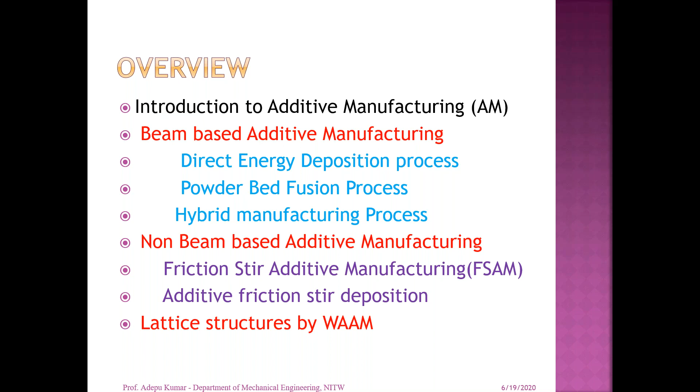Basically any manufacturing process can be categorized into 3 areas: subtractive, additive, and formative process. In subtractive process, you remove material from the stock to develop the product. In additive process, you add material layer by layer to finally achieve the final product. In formative process, you just change the shape from initial to final form.

Additive manufacturing is a manufacturing process in which functional parts can be made by adding materials without using special tools and fixtures. Without using these tools, jigs and fixtures, you have a lot of advantage in terms of reduction in lead time, less wastage, and cost independent of complexity of materials.

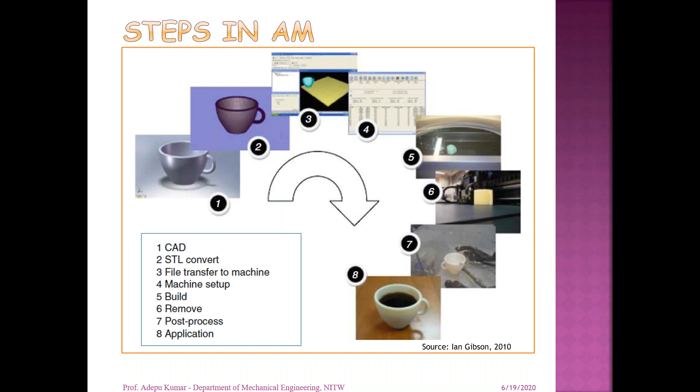Coming to the difference between CNC machine and additive manufacturing with respect to material, speed, complexity, accuracy, geometry and programming: if you see this picture, this cup is made of ceramic material, which is not possible in CNC machining process with good accuracy and good geometry.

Whereas in additive manufacturing, we can produce the component very easily, even ceramic materials. With respect to complexity, if you want to generate different cooling channels in electronic devices, because of their complex nature, CNC is not suitable, and you cannot get the accurate shape and size of the channel.

Once you apply this same technique to additive manufacturing process with respect to any complexity, because you are divided into STL file, and that STL file is the combination of each and every geometry, then you can able to produce the component very easily.

Coming to accuracy and geometry point of view, accuracy is very fine in CNC machine compared to AM machine, because some problems encountered during the solidification process of the additive manufacturing process that leads to inaccuracy, not equal to the accuracy we get from CNC machines.

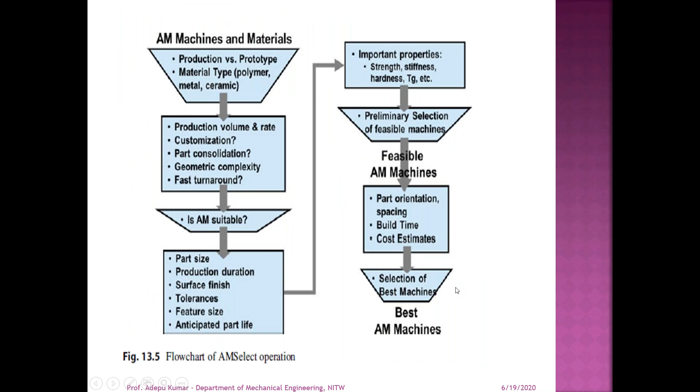After the break-even point, because you are producing more components with the use of a single machine, the cost is divided among the number of components, so the cost is reduced after the break-even point. Based on your production volume, you can decide which process is suitable for producing the components.

thermal energy to fuse material by melting it as it is being deposited. When you apply laser as an energy source, you can feed the powder with the proper flow rate at the exact focal point of the laser beam, where the maximum energy is available. That energy is utilized to melt the powder particles and deposit them onto the substrate.

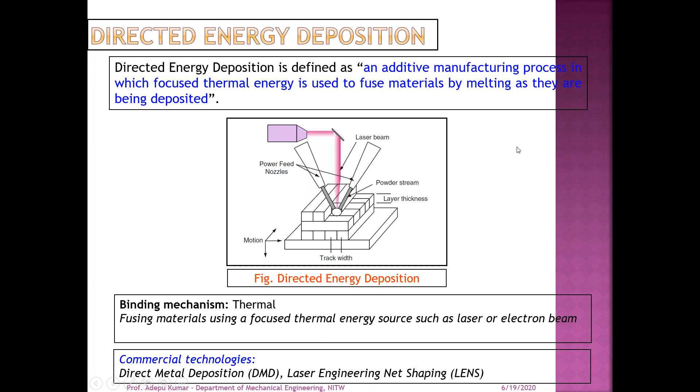It is also an additive manufacturing process generally used for repair and rebuild of worn or damaged components, to manufacture new components, and to apply wear and corrosion resistance coatings.

DMD produces fully dense and functional parts directly from CAD data by depositing metal powders pixel by pixel using laser melting and a patented closed loop control system to maintain dimensional accuracy and material integrity. With feedstock, 6-axis deposition, and multiple material delivery capability, it can coat, build, or rebuild parts having more complex geometries.

This is one of the energy sources, the electron beam, which we can use for building components through the additive manufacturing process. It is similar to electron beam welding.

You have an electron gun, and it emits electrons when high voltage is applied to the electron gun. It reaches thermionic temperature, and at that temperature electrons are emitted. Those electrons travel from the electrode to the target plate through the focusing coil and deflection coils.

You need to maintain a vacuum environment in electron beam welding, using electron beam as an energy source for the additive manufacturing process, because the electron mass is very, very low compared to the mass of nitrogen and oxygen present in the atmosphere. If you operate in open atmosphere, the target area is not reached because the electron's mass is very low.

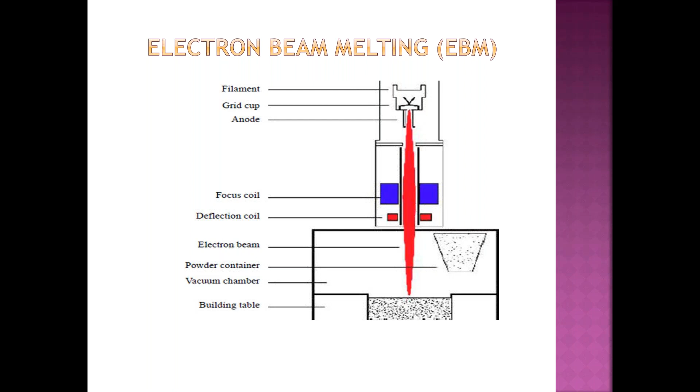This movement of the electron beam is similar to the geometry obtained through a CNC X and Y axis plotter from the CAD data file, with which you can generate different configurations of the components.

Depending upon the material you are going to use for additive manufacturing components, you can use either laser or electron beam as the source. This is the direct energy deposition process, where energy is directly impinging onto the powder particles or feeding material, causing melting and deposition to take place.

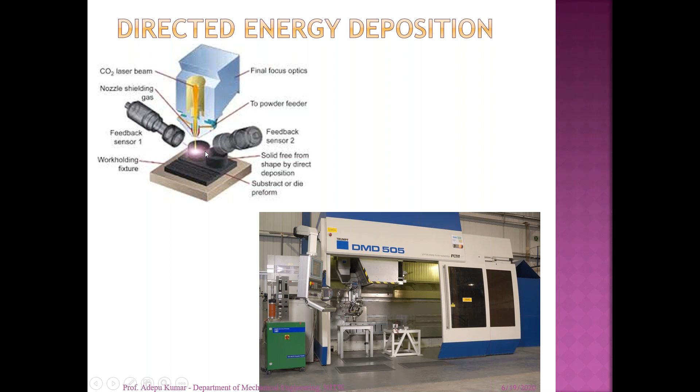This video shows a laser as a power source, where you feed the powder particles from the nozzle, and interaction between the laser and the powder particles causes melting to take place. This is another example.

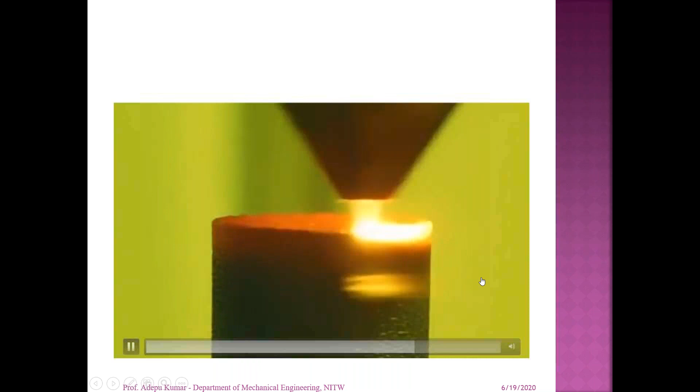Here the feed material is in the form of wire. You apply the laser or electron beam, and the material is melted and deposited onto the substrate.

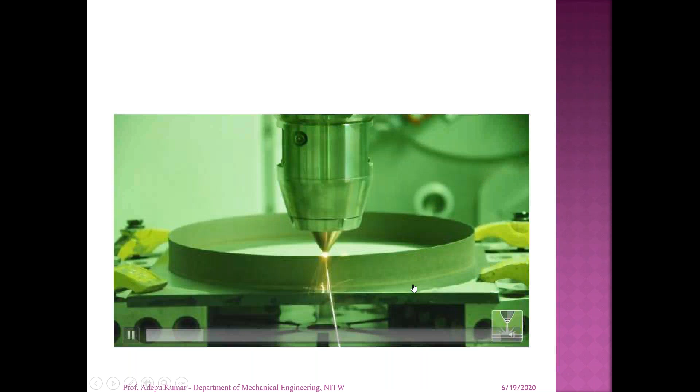So this is DED technology, with electron beam as a source or laser beam as a source. You feed the powder particles through different processes, melt the material, and deposit it onto the substrate. You can generate very complex geometries, and there is a difference between electron beam and laser as sources.

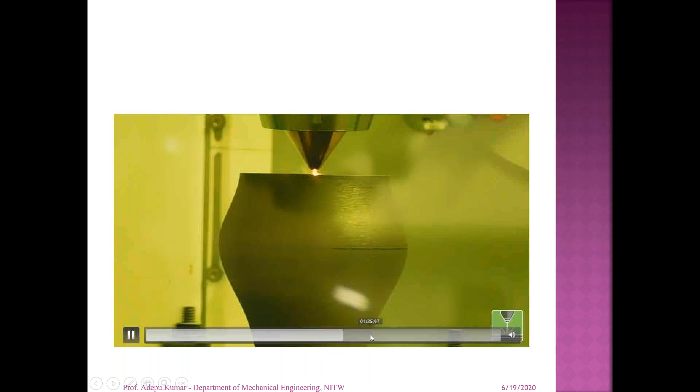The first one is a thermal source - electron beam. The second uses laser as an energy source. Regarding atmospheric conditions, electron beam always requires vacuum because the electron mass is very low compared to nitrogen and oxygen molecules. That's why you need to create a vacuum.

Some materials are active in open atmosphere, like titanium, aluminum, and magnesium alloys. For these you can go for an inert gas environment, so the material will not react with oxygen or nitrogen present in the atmosphere and form oxides. That's why we need to avoid oxide formation, so you go for an inert gas environment.

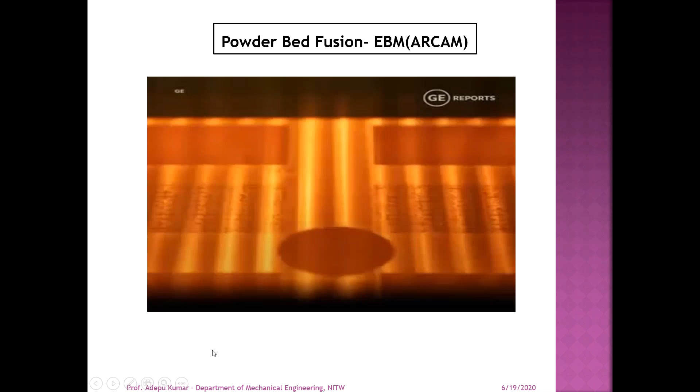The benefits: you can have high productivity because electron beam has high power density compared to laser, suitable for mass production. No residual or internal stresses develop because you concentrate energy on a particular area without affecting other areas as much as in powder bed fusion process. Less support is required for parts, and it's possible to stack parts on top of each other. There's no gas contamination and you get very fine structure and good mechanical properties because you use vacuum as the environment in electron beam melting.

There won't be any gases initially, but gas contamination can occur over a period of time because the melting of the material forms oxides, leading to gas contamination over time, not initially.

The drawbacks: conductive materials can be possible in electron beam source, then powder is sintered so it's tricky to remove. Long dead time between two productions, because every time you need to create a vacuum in electron beam as a source. That's why long dead time is needed for the electron beam melting process. And expensive maintenance cost, because you need to create a vacuum.

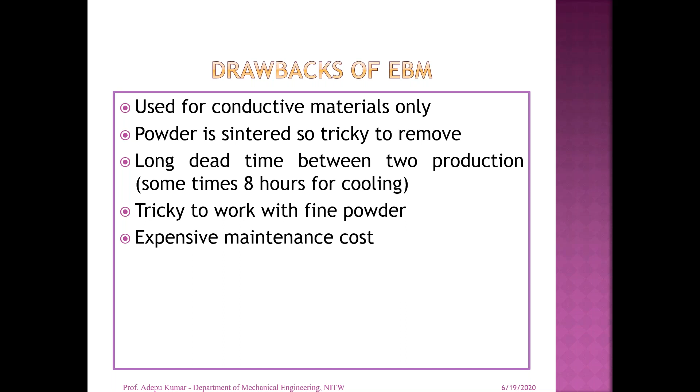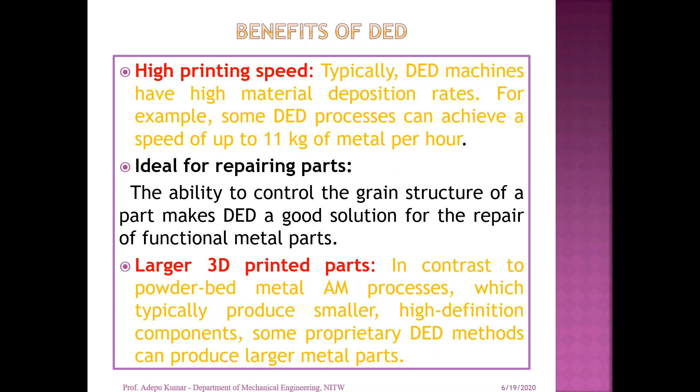The benefits: you can have high printing speed, because a lot of energy is available, you can go up to 11 kg per hour, and it is ideal for repairing parts, especially with the DED process. You can go for repairing of high structures like turbine blades. Then larger 3D printed parts and multi-material capability. You can also develop multi-material capabilities with the DED process, and high quality metal parts and hybrid manufacturing capabilities are also present in DED technology.

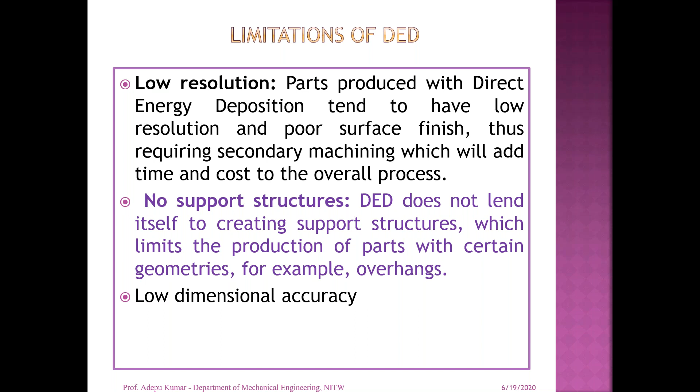Then limitations: low resolution and no support structures. DED does not lend itself to creating support structures as in the case of powder bed fusion process, but that is a limitation in the DED process. Then low dimensional accuracy. Applications include die repair and refurbishment, thermal management, direct metal products, and surface modification and coatings, aerospace and aircraft component repair, and these are turbine blades repaired by LENS or DMD technology.

Coming to the powder bed fusion process: powder bed fusion is defined as an additive manufacturing process in which thermal energy selectively fuses a region of the powder bed. Here the source is a laser source. Then you can move the XY plotter according to the STL geometry, STL file geometry. Then the laser moves in a particular direction so that it interacts with the powder particles. Then the powder particles are fused and solidified onto the surface so that you are able to build the components.

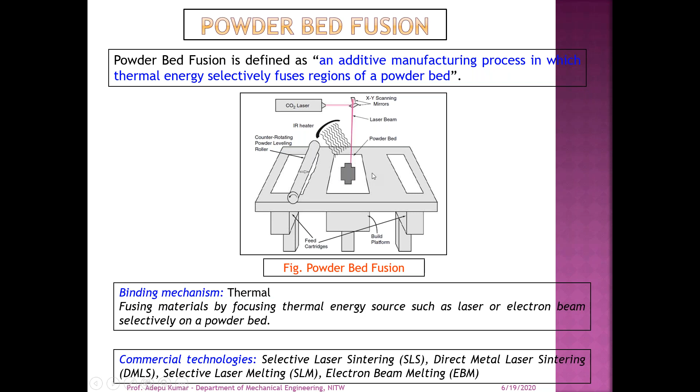Then the basic mechanism in laser-metal interaction: when this is a substrate material, the laser interacts with the substrate. Some of the laser is reflected back, some is scattered, and some is absorbed by the material. Then some of the laser is transmitted through the material.

So we need a unique property of material used as a laser power source, it should not have highly reflective materials, because if it is highly reflective, whatever energy comes from the laser source that interacts with the substrate or powder particles gets reflected totally. 90% of the energy is reflected back, only 10% is available, and that 10% is not sufficient to melt the material. So you need to avoid highly reflective materials. Because of this limitation, people also coat non-reflective materials onto the reflective materials, so that a small cavity is formed, which is enough for melting the material.

So you can relate this to radiant transfer in a black body. Once light is emitted and impinges on the small cavity, it reflects back and forth so that heat is accumulated. Then we can treat it as a black body.

Similarly, the small thickness of the layer, which is highly non-reflective in nature, takes care of the highly reflective material. Then it creates a small cavity, which is enough for the light energy. The laser impinges onto the cavity, then it reflects back and forth so that the energy is accumulated, and that energy is transferred to the substrate so that the metal is melted.

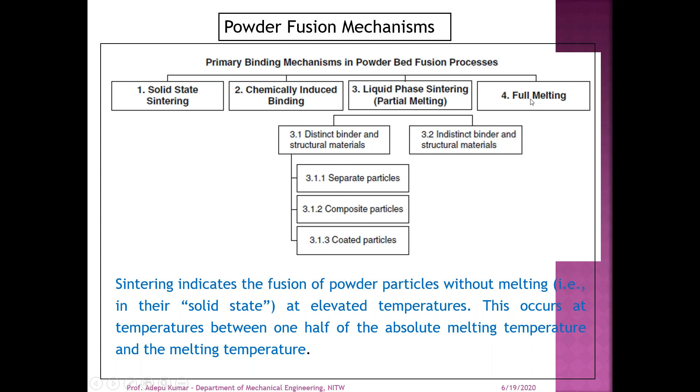So what is solid sintering? You can see the spherical powder particles combined together with voids between them. Once you apply energy, that energy is absorbed by the spherical particles and necking formation starts. This necking continues during sintering, so the porosity and cavity become very low compared to the initial state. This is one mechanism used in powder bed fusion process.

Another mechanism is chemically induced sintering. For example, laser processing silicon carbide in the presence of oxygen, where SiO2 forms and binds together a composite of SiC and SiO2. If you process SiC in an open atmosphere, the oxygen reacts with the SiC to form SiO2, which acts as a binder between the SiC particles to form a composite.

Similarly, zirconium boride in the presence of oxygen forms zirconium oxide, which binds together a composite of zirconium boride and zirconium oxide. Another example is aluminum in the presence of nitrogen forming aluminum nitride particles. Using this technology, we can combine SiC and SiO2, or aluminum and aluminum nitride, to make composites very easily.

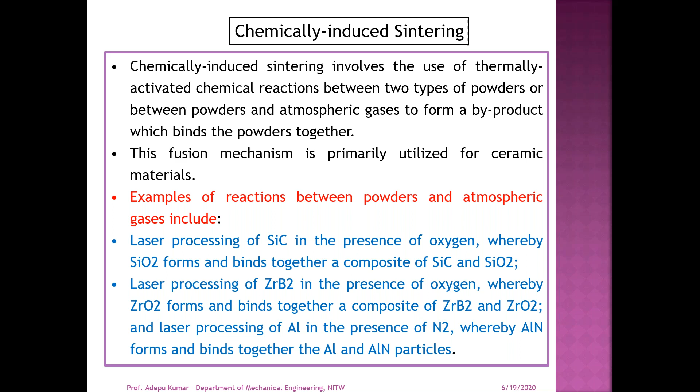Another mechanism is liquid phase sintering, partial melting, and full melting. Here the powder particles are combined with a coating material that is coated onto or added to the particles. When energy is absorbed by the coated material, which has a low melting point, it converts into a liquid state, occupies the space between grains, and acts as a binder. That is another mechanism involved in this process.

Now, Markforged is one company making this type of technology, using a binder as one filler material and the actual material as another filler material. They join them where the laser is focused on the substrate. Because of the low melting point of the binder material, it melts and occupies the space between the grains of the actual material. After that, sintering happens, and the binder material burns away due to its low melting point. Then sintering occurs, so the parts can be produced very easily. This also comes under direct DED technology.

Another mechanism is full melting. Because of the high energy supplied to the powder particles, they melt and fuse together, forming onto the substrate so that you can build the component easily. This is the powder bed fusion mechanism.

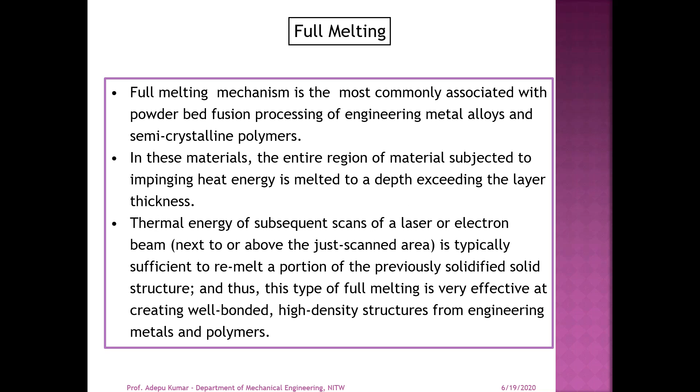The laser interacts with the powder particles according to the required geometry. The geometry is taken from the STL file format, so the laser interacts with the powder particles based on that format. Then you add a layer, and repeat the process to develop the component very easily.

The PBF process for amorphous polymers has been successful. Polymers, metals, and ceramic materials can also be used as feed materials for the powder bed fusion process.

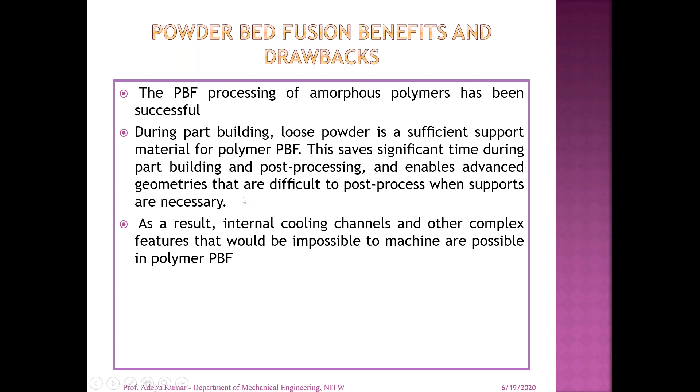The advantages are low cost and minimal support, because the powder itself supports small structures, though not large ones. There's a wide material choice, including ceramics, glass, plastics, metals, and alloys. Also, powder recycling is possible, with 30 to 70% of the powder reusable.

Accuracy and surface finish are strongly influenced by operating conditions and powder particle size. This plays a very important role in achieving the final geometry as well as the properties of components produced through powder bed fusion process.

Finer particle size produces smoother, more accurate parts, but is difficult to spread and handle. Larger particle sizes facilitate easier powder processing and delivery, but hurt surface finish, minimum feature size, and minimum layer thickness.

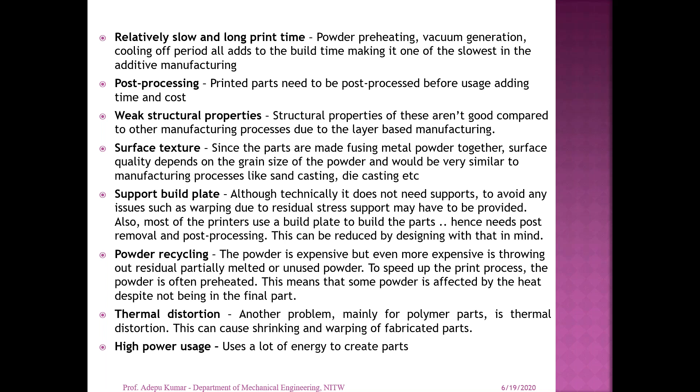With the PBF process, total part construction time can take longer than other additive manufacturing processes, because preheat and cool-down cycles are involved, which takes a lot of time. There's relatively slow and long print time, post-processing required, weak structural properties, surface texture issues, support and build plate and powder recycling concerns, thermal distortion, and high power usage. These are the drawbacks of the powder bed fusion process.

Applications include medical, aerospace, manufacturing, and automotive industries. A recent example of PBF application is the manufacturing of the fuel nozzle for General Electric's GE9X engine, used on Boeing's 777X aircraft. The GE9X is the largest turbofan engine produced, and the additively manufactured nozzle is 5 times more durable than previous versions.

So these are the various applications in the form of a chart, part model, and you can get the CAD model, convert into STL file, then either powder bed fusion or directed energy. Then you can use this technology to convert into a solid one.

Then application depends on aerospace and oil and gas. This is GE9X in fuel nozzle.

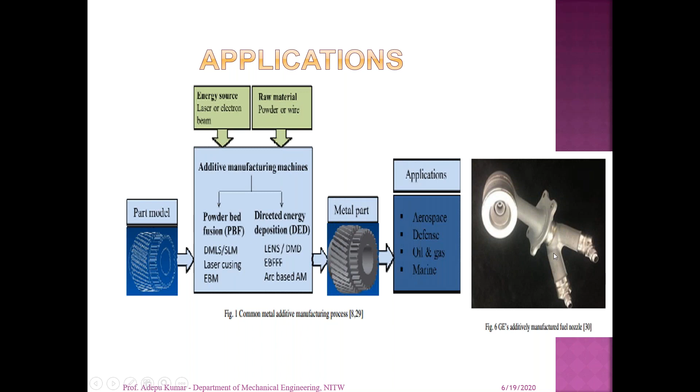So applications include bearing, orthopedic implants, medical, with a very high strength to weight ratio and no biocompatibility concerns, and aircraft structural components, commercial aerospace, lightweighting advantages versus similar utilized metal alloys, automobile fuel management system, automotive performance, excellent fatigue and chemical resistance properties.

Then coming to the combination of additive and subtractive process, so we can call it a hybrid machining process.

It is not a new process. Every additive manufacturing process component, you need to go for post processing. So that is a subtractive process. You want to remove the material from the unwanted areas, then finally you can get the correct surface finish as well as good geometry. So here, inbuilt machines are available with additive as well as subtractive manufacturing, so that you can save a lot of time for developing.

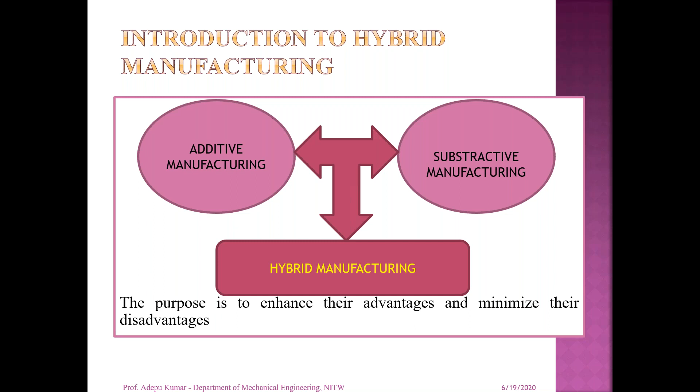Now you can remove this DED setup and you can add any milling cutter, so that you can remove the unwanted material from the developed components.

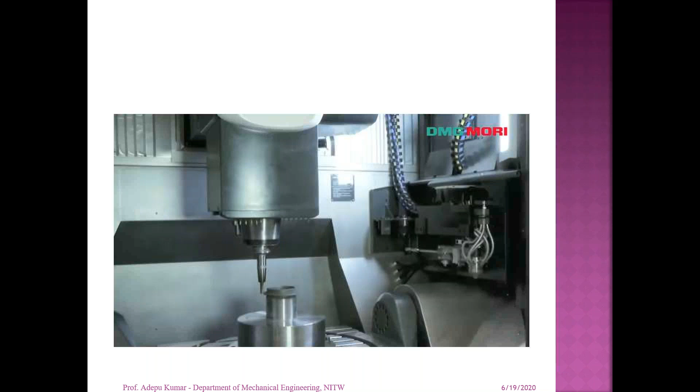Now coming to the non-beam based metal additive manufacturing process. In the previous slides we were using a beam based process, that is either laser or electron beam or any arc as an energy source. That energy is utilized for melting the material and depositing it on the substrate, so that you can make a component. The non-beam based metal additive manufacturing includes friction stir additive manufacturing, additive friction stir deposition, and ultrasonic additive manufacturing.

So what is the importance of non-beam based metal additive manufacturing? Here, melting of the material does not take place during the additive process using this technology, whereas in beam based, either melting or partial melting occurs, and then you get the object.

So during the melting process, some of the materials may react with the environment. That's why you need to provide a vacuum environment or inert gas environment. So even if you take care of all these things, there may be some materials which are not compatible between the two materials. It is not possible to produce additive manufacturing in different materials with these beam-based technologies.

Whereas in this case, you are not melting the material. There is no problem of compatibility between the two materials. Then you can able to produce the component very easily, even if the materials are not weldable.

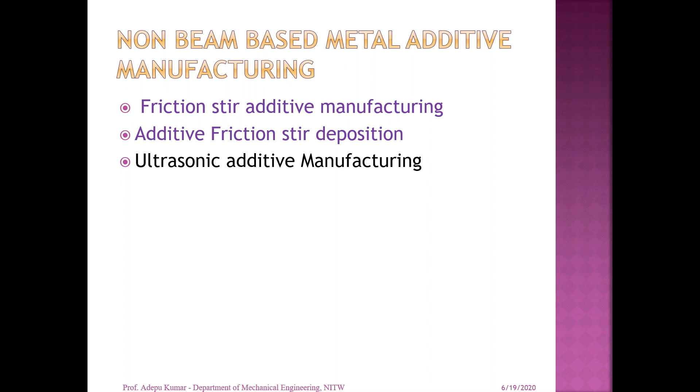So both friction stir additive manufacturing and friction stir deposition are different, not the same - they are intensive processes that involve severe plastic deformation at high temperature. Both processes involve severe plastic deformation that leads to dynamic recrystallization. Finally, you can achieve grain refinement, so that you can generate components which have a high strength to weight ratio.

However, there is a significant difference between them. Friction stir additive manufacturing comes under hybrid process because it is a sheet lamination process. In sheet lamination, you make sheets with good surface finish, then process the sheets so that you can build the components. Initially you remove unwanted material from the sheets to achieve good surface finish and perfect matching between the two sheets. Then finally you add the additive process to build the final component.

Whereas the other process, additive friction stir deposition, involves completely depositing material onto the substrate. The deposited material has a very low melting point temperature compared to the substrate material, or equal to it.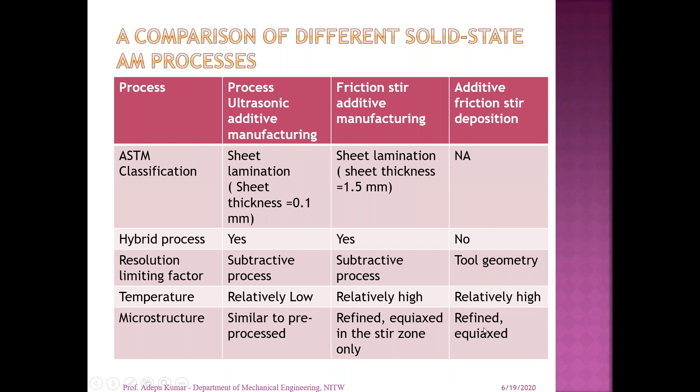Now this is friction stir additive manufacturing, which is similar to friction stir welding. Here we see different layers, each with a minimum thickness of 1.5 mm. You stack them into a particular position, then process them using a friction stir welding tool, which has a shoulder as well as a pin.

The pin is inserted between the layers, and then you can process it. The tool is rotated at a certain RPM, and the shoulder contacts the top surface of the layer. Because of the rotating and non-rotating members, heat is generated due to friction. That heat is transferred to all the layers until it reaches the recrystallization temperature of the material.

Then you move the tool in the processing direction so that the metal moves from the advancing side to the retreating side. This fills the gap so that you can generate the component very easily.

Now I am showing a video related to friction stir additive manufacturing.

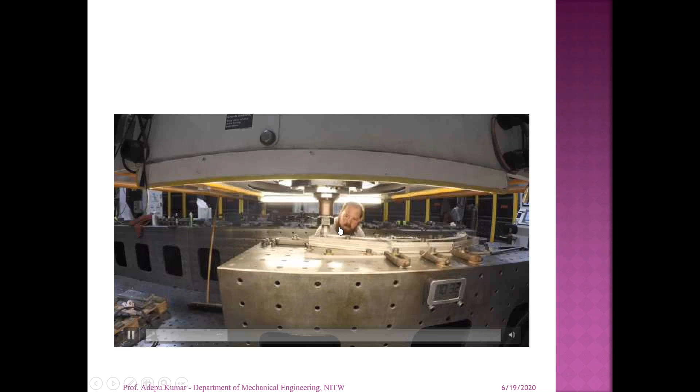So all these sheets are stacked into a particular position. The tool is rotating and moving in the processing direction. Then he proceeds to the next step for processing all the sheets which are in that particular position.

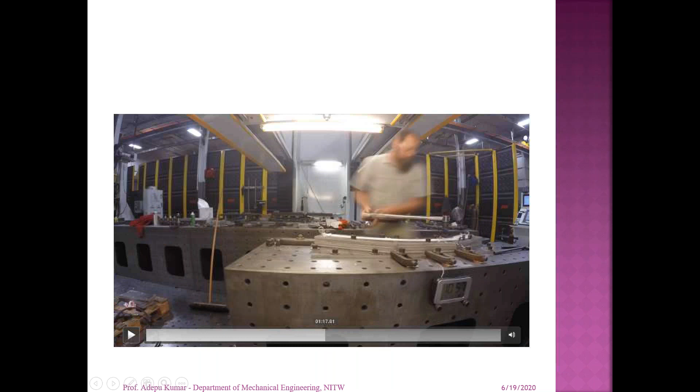After that, you can remove the material, combining both additive and subtractive processes. Now he is removing the unwanted material with the help of a milling cutter.

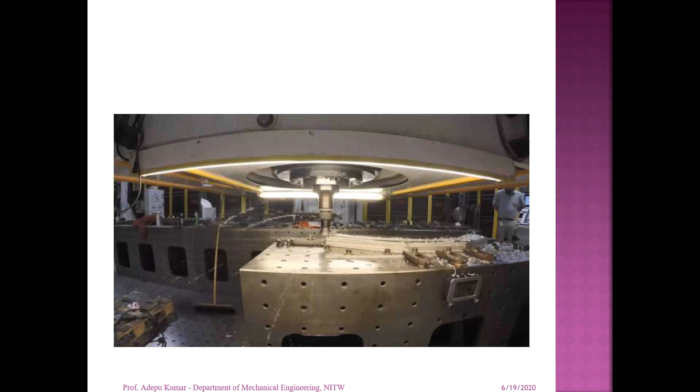Yeah, this is the final component. So it's very easy to produce the component within a very short time.

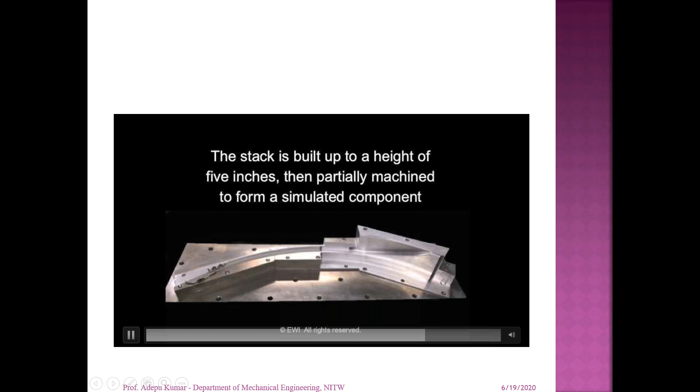Now the basic mechanism, another technology, is the additive friction stir deposition process. The difference between friction stir additive process and additive friction stir deposition process is that here the feeding material is inserted in the hollow shoulder.

Then the shoulder is rotated at a certain RPM and contacts the substrate which is at the bottom. There will be contact between the rotating hollow shoulder and the substrate, generating heat. That heat is transferred to the substrate, the tool, and the material inside the shoulder. Since the material has a lower melting point temperature compared to the shoulder, the metal is deposited onto the substrate so that a layer is generated.

So that's the basic difference between friction stir additive process and additive friction stir deposition. In the friction stir additive process, you have a stack of layers, a pin, and a shoulder. The shoulder rotates at a certain RPM and reaches the requisite temperature because of contact with the shoulder and the stack of material, increasing the temperature until it reaches that requisite level.

At that moment, you move the shoulder in the processing direction so that you are able to generate the additive manufacturing components in that region, allowing you to generate a larger size. You can shift this region to another region, either to the left side or right side, to generate a bulk sized additive manufacturing component.

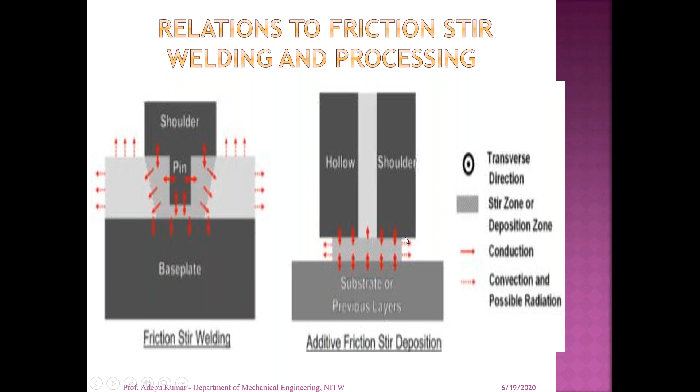So this is the additive friction stir deposition process. How can we develop composites, or develop additive manufacturing components, through this process?

There are 4 steps involved in this arrangement. In step 1, you make a groove whose length is equal to the length of the pin. Then you insert the material into the groove and process it. After that, you go for the second step.

The pin length is lesser than in step one. You make a groove, then fill it with another material or the same material, and process it.

In the third step, the pin length is still lower than the second one. You make a groove equal to the length of the pin, insert the same or a different material, and process it.

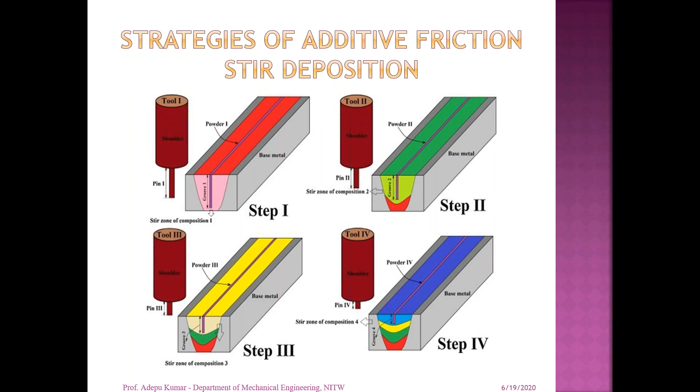In the fourth step, you generate another layer with material equal to the same pin length, applying the same procedure. This way, you can generate composites in bulk or at a smaller scale.

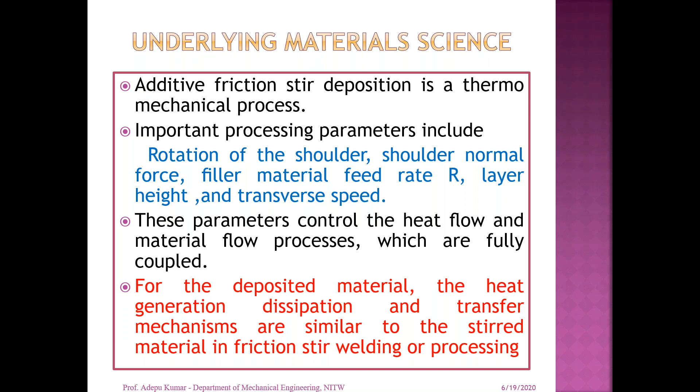Microstructure formation and applicability to non-weldable alloys is the same in both friction stir welding and processing. A shoulder with a protruding pin is spun at high speed and inserted into the softened material. The shoulder then traverses the material to either join two interfaces in friction stir welding or treat the surface in friction stir processing. However, in additive friction deposition, there is no pin structure penetrating the base material.

The different geometry configurations lead to different heat flow boundaries, and therefore different cooling rates. In additive friction deposition, there is no pin because the material is fed through the provision instead, which causes a large difference in heat generation.

The low porosity and residual stresses in the as-deposited part render post-processing heat treatment unnecessary, although post-processing for surface finish is often required. This is one of the papers I took from a journal.

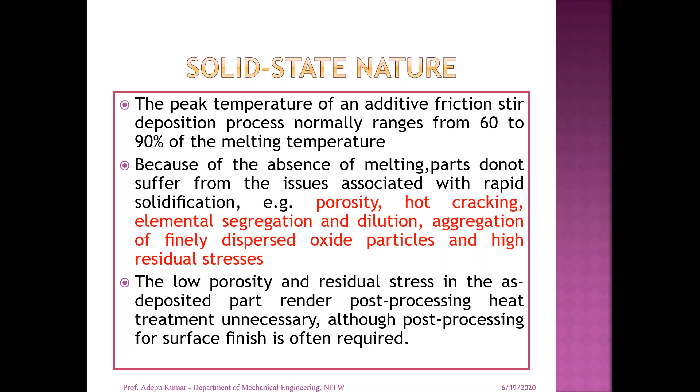He was able to produce additive manufacturing components - tantalum and niobium coating deposited on a copper substrate, showing strong mechanical bonding and no delamination under bending.

Niobium and tantalum is deposited onto the copper material, and you can see no delamination of the component. That's why they can conduct a bend test, so that there will not be any delamination. There will be a perfect bond between the two, even though they are two different materials with different material properties and physical and chemical properties - there will not be any difference in the metallurgical aspects.

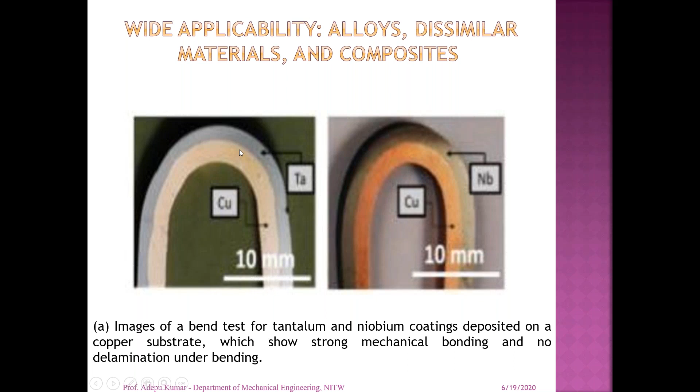So what are the advantages? Flexibility in feed material - beam-based processes have a restriction on feed material in terms of powder composition, shape, and size. In beam-based processes, the powder composition, shape, and size influence the properties of the material. This imposes a great barrier.

The development of powders at the nano and micron level adds additional cost to the powder bed fusion process, which is a greater barrier for widespread implementation of metal additive manufacturing.

In contrast, additive friction deposition can use a solid rod made from cast or wrought alloys as the feed material, because already well-developed technologies are available in casting or rod forging processes. With that, you can develop the rod material, which is used as a feed material in the friction stir, additive friction stir deposition process.

Regarding scalability, you can achieve large scale. As shown in the video, you can produce large scale parts compared to the additive manufacturing process.

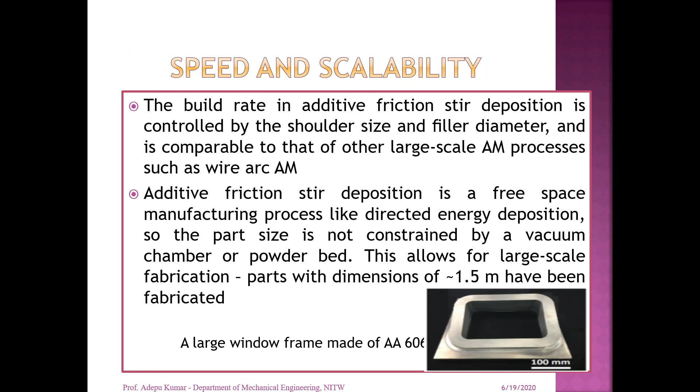What are the benefits with respect to the different categories? One is non-beam, flexible feed material, and scalable. Being non-beam means no melting, low energy, low cost, using dynamic recrystallization with no solidification, resulting in refined grain size, equiaxed grain size, and isotropic properties.

Then flexibility in feed material - either cast or consolidated powder, so you can make powder metallurgy components. Then exploration of new materials - you can add different materials. No hot cracking, low elemental segregation, no aggregation of oxide particles, and no non-weldable materials.

And scalability gives high build rate, large scale parts, and the ability to repair - you can also repair structures. So every process has its own advantages, then apart from some limitations.

Now the limitations: additive friction stir based technology has focused on increasing part size and build rate. As a result, the shoulder and filler dimensions are large, leading to a large in-plane feature size. In additive friction stir deposition, the deposition path is guided by a G-code based hatch pattern.

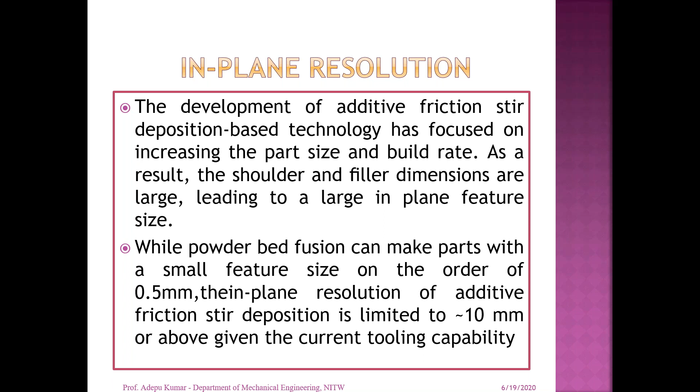Since algorithms are available to automatically convert the CAD file to G-code, it is straightforward to go from CAD file to part, as long as the geometry is suitable.

The printable geometry is limited by the in-plane resolution and maximum overhang angle in additive friction deposition. Given the layer-by-layer nature, additive friction deposition parts may require additional post-processing to compensate for the stepwise transition at the edge of each layer.

Another issue in friction stir deposition is buckling. When the height of the structure is very high, you need to apply vertical force, which is very efficient and compulsory in friction stir additive processes. Due to that, buckling takes place.

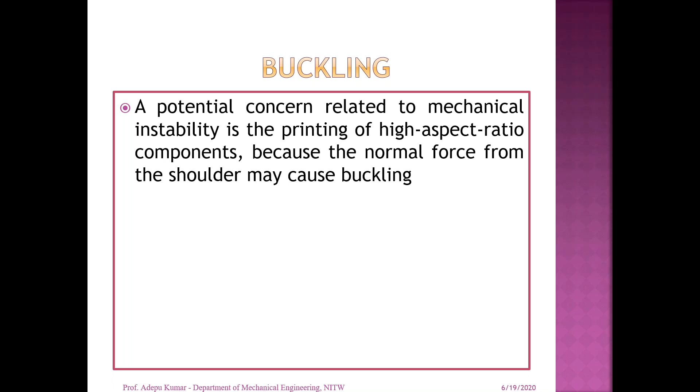That is another issue. Tooling is also an issue because the tool is always in contact with the substrate surface, so a lot of heat is generated. Because of that heat, it is transferred to the feeding material, so it is always exposed to high temperature.

I think the pathway for widespread implementation of metal AM needs a series of attributes such as affordability to customers, convenience and ease of use, energy efficiency, and environment friendliness, because this process is environment friendly. It is also widely applicable to engineering materials.

You can weld any materials, even non-weldable materials, but in powder bed fusion or DED processes, non-weldable materials cannot be used. If combining two or more materials, metallurgical compatibility should be there in powder bed fusion or electron beam processes. Then there's compatibility with mature technologies and reliability of part properties.

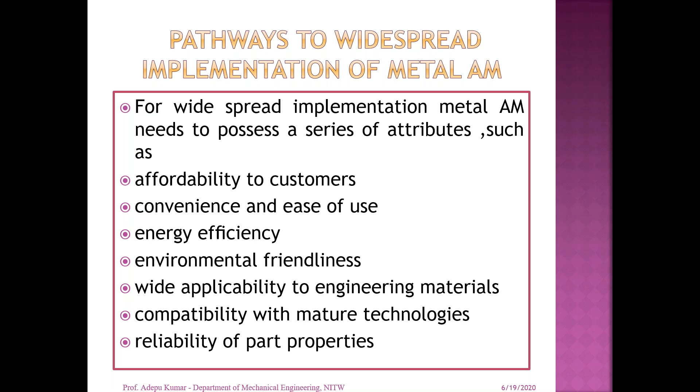Then coming to the last topic, lattice structures. Lattice structures are a unique class of space grid structure composed of interior struts with certain diameters and angles. This space grid structure has extensive application in the aerospace field due to combinational advantages such as lightweight, high strength, high heat insulation, shock absorption, and noise reduction.

So there are many advantages to using lattice structures. One is you can improve strength to weight ratio, and also achieve heat insulation, shock absorption, and noise reduction. At present, aluminum alloy materials are widely selected to fabricate lattice structures because aluminum alloys are very useful in aerospace and defense components, since they have a low melting point temperature, which is why we can use them for making lattice structures.

What are the traditional manufacturing methods for producing lattice structures? The traditional manufacturing methods of metal lattice structures include investment casting, plastic processing methods, and the combination of extrusion and electrical discharge machining. Using conventional technology, you can generate lattice structures, however, these methods have high requirements of materials and face great difficulty fabricating such complex structures. This limits the design freedom of material and structure because the structure itself is very, very small, so due to that complexity, you cannot produce it via the conventional route.

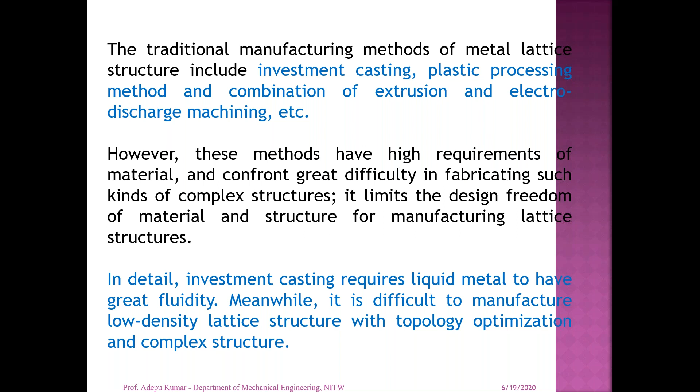In detail, investment casting requires liquid metal to have good fluidity, and it is difficult to manufacture low density lattice structures with topology optimization and complex structures. The combination of extrusion and electro-discharge machining is only used for manufacturing pyramid lattice structures. Further, these traditional manufacturing methods have complex technology processes requiring design and molding, all having high cost.

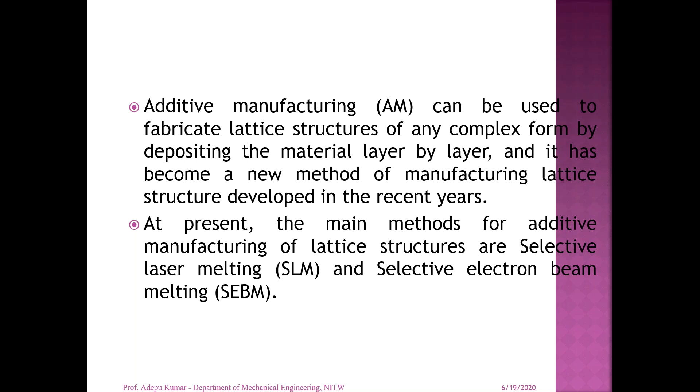Additive manufacturing can be used to fabricate lattice structures of any complex form by depositing material layer by layer, and it has become a new method for manufacturing lattice structures developed in recent years. Present technologies like SLM and SEBM are used for making lattice structures, and we are also going to use wire additive manufacturing for producing lattice structures.

The basics of wire additive manufacturing were already discussed in the last lecture, so I'm not going into detail on the process, but component-wise, you can see pyramid type lattice structures being produced. You can also see the metallographic structure of ER2319 aluminum alloy, where there is good bonding between the two grains, allowing you to produce stronger components.

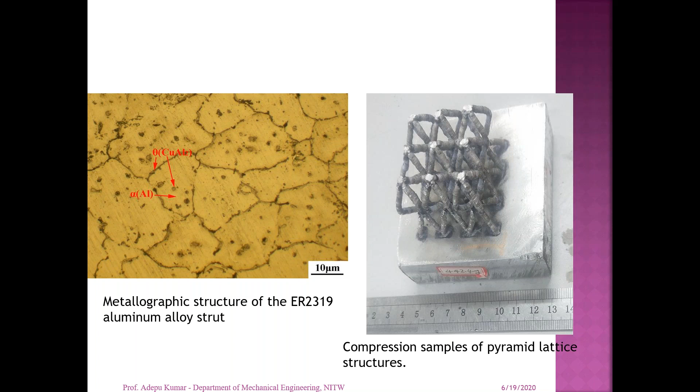In lattice structure, the scheme is that one strut is connected by a node, and this follows a sequence of manufacturing strategy to produce the lattice structure. Thus, first you need to produce the strut, then add the node to that, and you can build the components. Using wire arc additive manufacturing, we can produce these components very easily.

The first patent was in 1920. Wire arc additive manufacturing is probably the oldest and simplest, but least talked about range of additive manufacturing processes, because at that time CAD, CAM environments and CNC were not well developed. Now we can integrate CAD, CAM, and CNC, and produce additive manufacturing components through the welding route.

With the resolution achieved, you can generate a deposition rate of 1 to 10 kg per hour depending upon the arc source. You can also use multiple arc sources with this technology.

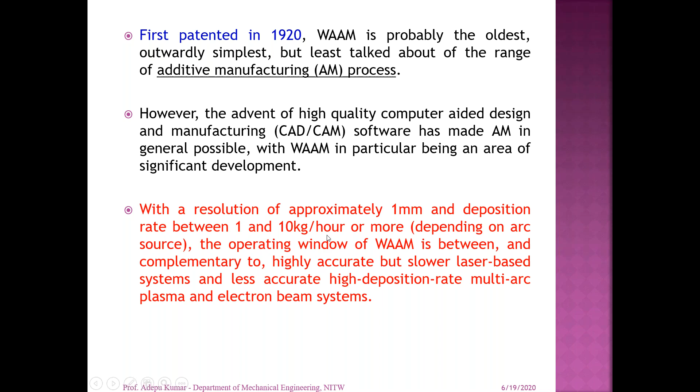The main research groups working in WAAM technology are in China, Holland, United Kingdom, France, United States, India, Australia, and South Korea. There are several synonyms for WAAM: welding deposition, welding based deposition, welding based rapid prototyping, 3D welding, 3D micro welding, near net shape manufacturing, hybrid layered manufacturing, shape deposition manufacturing, shape metal deposition, direct energy GMAW based additive manufacturing, and multiple plasma arc welding based rapid prototyping.

Various welding processes can be used: GMAW, gas tungsten arc, plasma arc, and submerged arc. Apart from that, CMT can also be used.

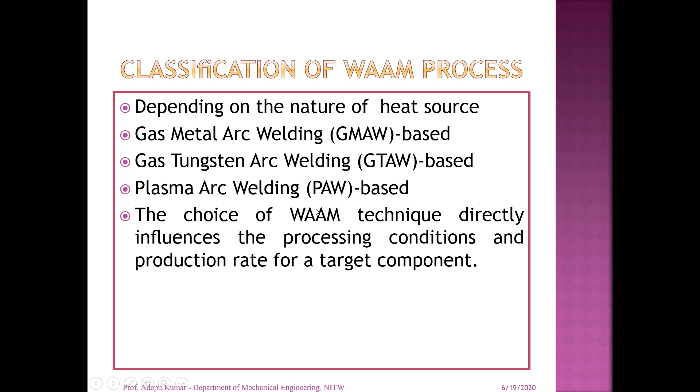Now, what are the features and energy source? I'm focusing on cold metal transfer, which uses a reciprocating consumable wire electrode. Its typical deposition rate is higher than normal welding processes, and it is deposited in a cold state.

The robotic based system includes a manipulation system, CAD, CAM, and software. Here you can see the robotic welding gun attached to the end of the robot arm, allowing you to print the component very easily. Here you can see the metal transfer happening.

Some of the materials generated using WAAM technology include titanium alloy, 4043, and Inconel 718. If you look at Inconel 718, you can see one layer, then another layer, and so on. Between the layers, there must be a perfect bond. Without a bond between the two layers, the component will not have strength and will lose its properties. That's why creating a bond between layers is very important in any additive manufacturing process.

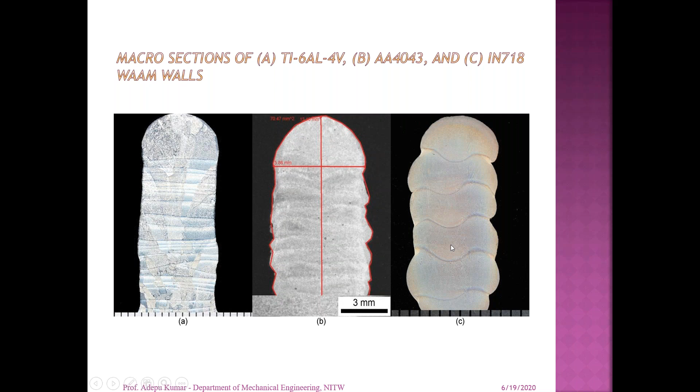Quality performance depends on the process: TIG, MIG, plasma, wire design, heat treatment, short-circuit working, interpass, and post-weld treatments can all be done on wire arc additive manufacturing components. Out of these, CMT is better than other welding processes. If you want to build small structures, you can use pulsed TIG welding as the source for WAAM.

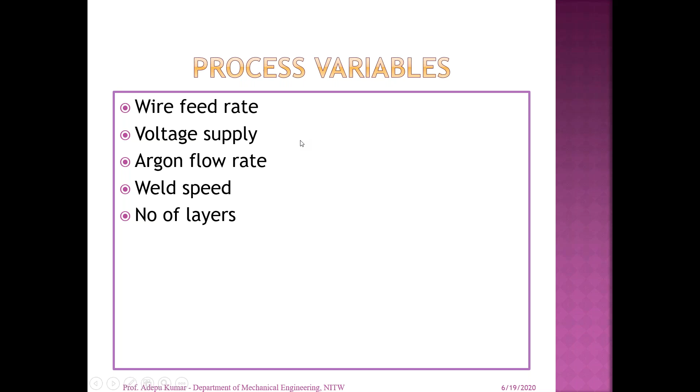The variables used are wire feed rate, voltage, argon flow, and weld speed, similar to normal welding processes. There isn't much difference; I'm focusing on the heat transfer and metal transfer, which goes from the electrode tip to the substrate. In spray transfer, the deposition deviates from the target place, but in short circuit transfer, the deposition lands exactly onto the substrate. This is possible in CMT welding but not in other welding processes.

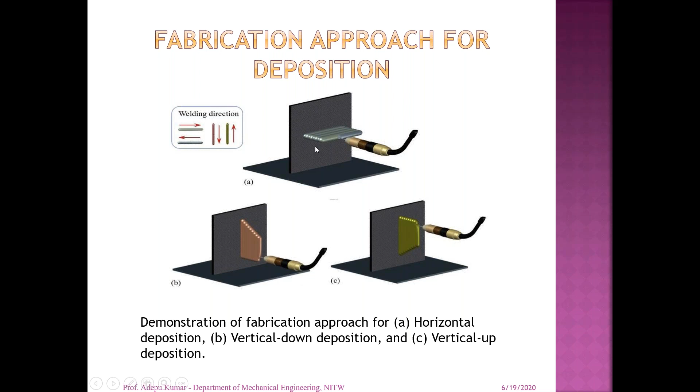You can also produce support structures. These structures can be generated using either vertical or horizontal movement of the torch, allowing you to generate the components from CAD files. Due to gravity, there is some deviation from the exact location. These are support structures and lattice structures produced through wire arc additive manufacturing techniques.

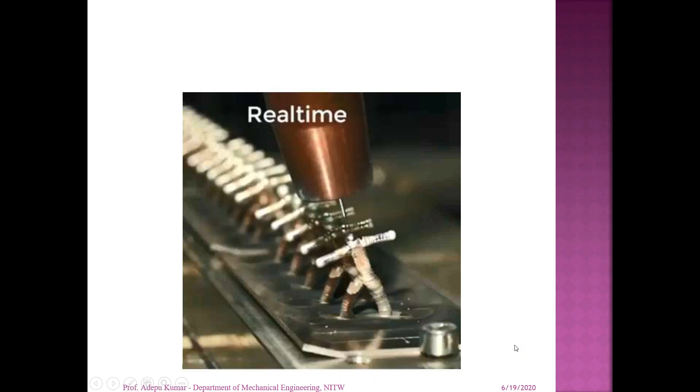Benefits were already covered in the last class by one of the speakers. Applications include 3D printed ship propellers. Now, coming to what is 4D printing.

4D printing is the process through which a 3D printed object transforms itself into another structure under the influence of external energy input such as temperature, light, or other environmental stimulation. It is similar to a 3D printed object, but when exposed to external power, it changes its dimension over time. That is known as 4D printing.

4D printing is also related to bioprinting, active origami, or shape memory morphing systems, which use the same techniques as 3D printing, where a computer program deposits material in successive layers to create a three-dimensional object. However, 4D printing adds the dimension of transformation over time. It is therefore a type of programmable matter, where after fabrication, the printed product reacts with environmental parameters like humidity and temperature and changes its form accordingly.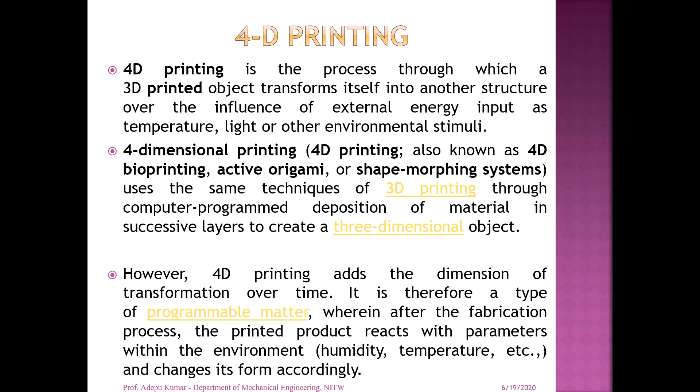So comparing 3D printing and 4D printing: in 3D printing, you simply supply the material as feedstock into the system, take the CAD geometry, and print the structure.

Whereas in 4D printing, you are able to generate smart materials. After printing, you can apply stimulation to the developed 3D printed component, and according to that, it changes direction and shape.

The most obvious advantage of 4D printing is size change: through computational folding, objects larger than the printer can be printed as only one part. Since 4D printed objects can change shape, shrink and unfold, objects too large to fit a printer can be compressed for 3D printing into a secondary form.

New materials and new properties, mostly shape memory materials, can be used in the 4D printing process. Another advantage is the use of possible applied materials. 4D printing has vast potential to revolutionize the world of materials as we know it today.

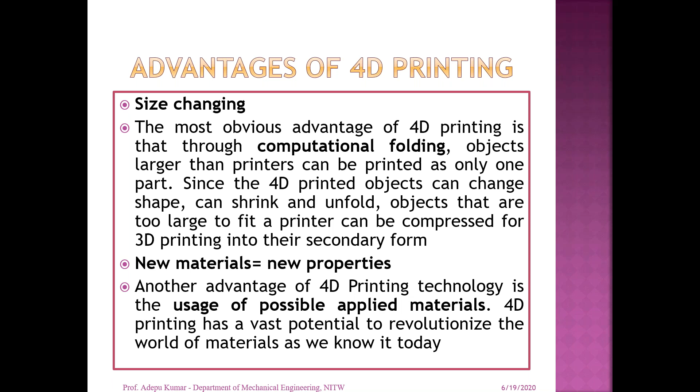Applications include self-repair piping systems, self-assembly furniture, medical industry, and fashion design.

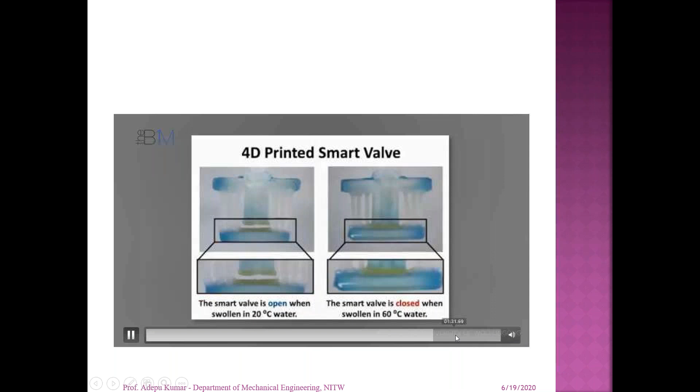That is the 4D printing process. Now coming to 5D printing - the name of this technology is quite misleading since it does not refer to the addition of a fifth dimension to the printing process. Instead, 5D printing refers to 3D printing using a 5-axis 3D printer instead of the 3-axis used in conventional 3D printing.

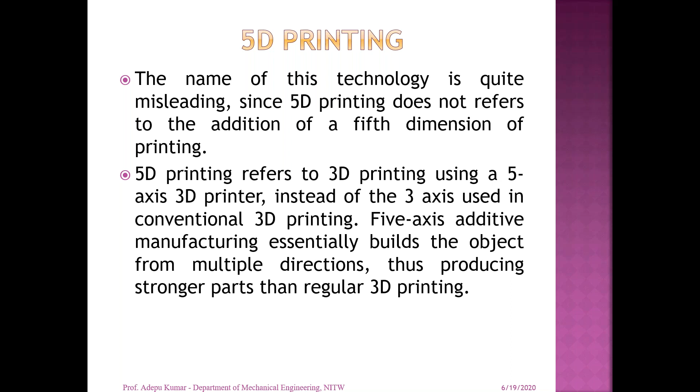5-axis additive manufacturing essentially builds the object from multiple directions, producing stronger parts than the regular 3D printing process. In conventional 3D printing, the object is created by addition of horizontal layers deposited on top of each other. With 5D or 5-axis printing, the print head is capable of moving back and forth on 2 additional axes, in addition to the X, Y, and Z axes of the 3D printer, hence the total of 5 axes.

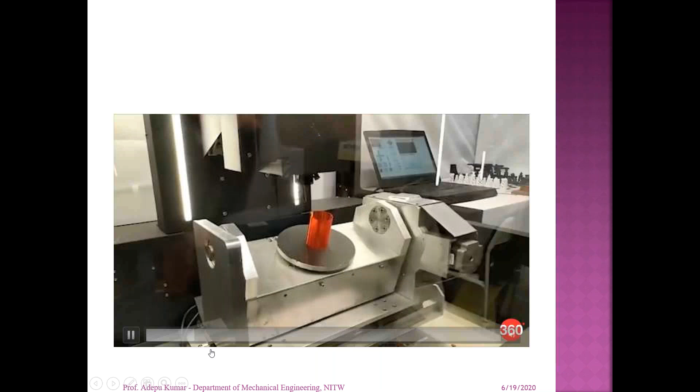You can see the video of 5D printing. 5D printing is better called 5-axis printing, where there are 5 distinct axes along with the printer head. This allows for far more complex structures to be printed while also enabling much stronger construction.

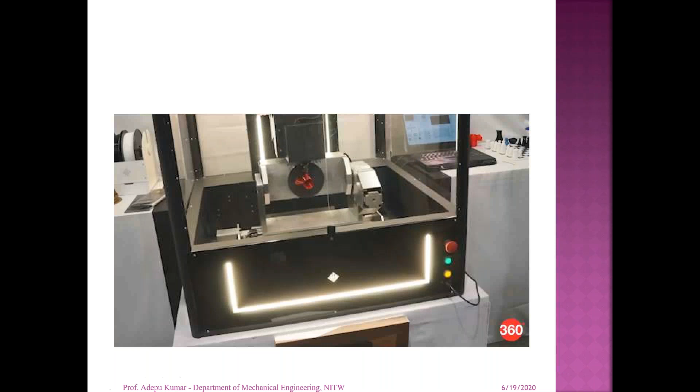In a typical 3D printer, the head moves layer to layer, depositing a thin amount of extruded plastic, essentially breaking the object into flat slices and printing them - this requires a completely new 3D printer design. But with 5-axis, since the bed itself is moving, it gives you freedom to print more complex kinds of structures.

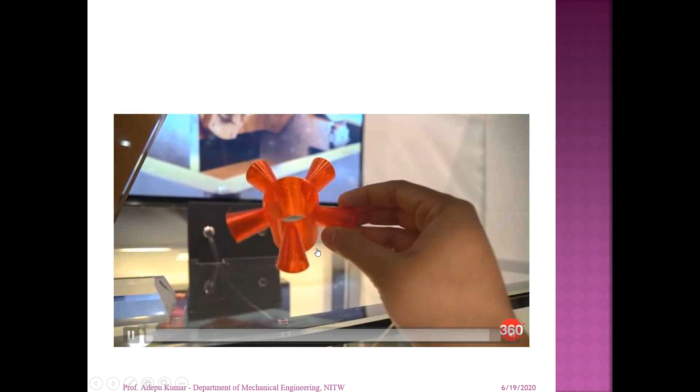You can also develop new products and go for innovation of the kinds of objects produced through any additive manufacturing technology, because each and every technology has its own limitations. You need to take care of those limitations when developing innovative objects, mostly in biomedical applications - dental, paramedical, and biological applications.

Rapid tooling and rapid manufacturing are important because you need to increase the life of the tooling, which requires cooling channels. If the cooling channels have complex geometry to increase the heat transfer rate, the life of the tooling increases. For that, you need to go for additive manufacturing processes to develop the complex nature of cooling channels in the tooling for rapid manufacturing.

Geometric modeling, data exchange, and software issues also need attention, from the CAD file onwards to STL file conversion. Many such things need to be worked on to get into the papers.